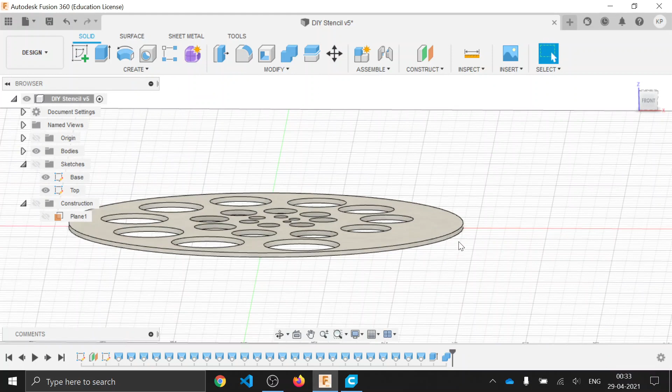It is a stencil. It's a shape that's used to draw circles on a piece of paper, and to be specific, you can draw circles that have any integer diameter starting from 1 mm to 25 mm, right? And the diameter of the whole thing is 140 millimeters. The thickness is 1.5 millimeters. It's a relatively simple model. We can look at the sequence of operations I did.

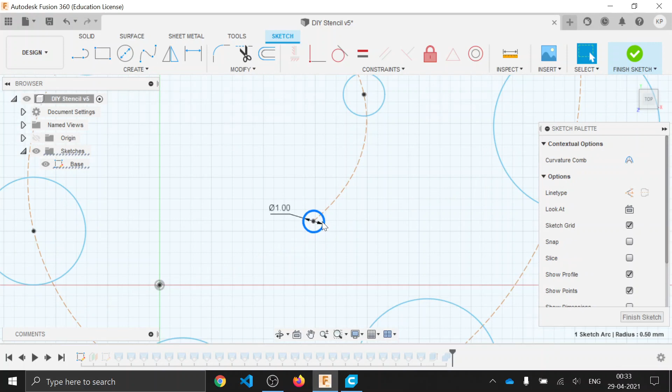First, I started with drawing a sketch at the base, which we can see here. Obviously, it's a very simple sketch. It's a circle of 140 mm diameter. I've taken 25 circles starting from 1 mm and then 2 mm and then 3 mm all the way up to 25 mm, and all I did was I just manually placed the circles in this spiral manner.

I've drawn this T-spline passing through the centers as a construction line, and I just kept shifting the centers manually until the spline looked roughly like a spiral. That's it really. It's just mostly manual adjustments, and I'll be honest, I spent quite a while on this, and I'd say it does look more or less like a spiral. It does get the job done, right?

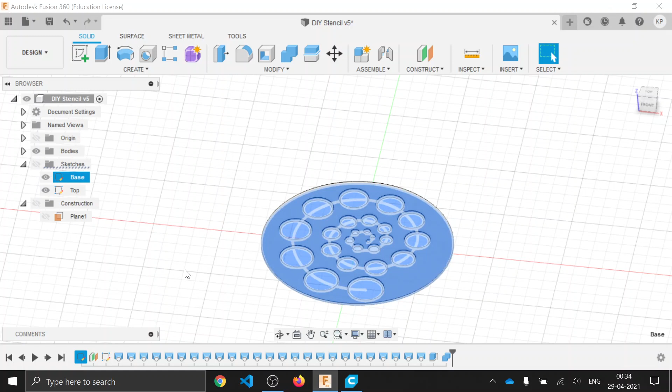Now, my original goal was to just extrude this base by 1.5 millimeters and call it a finished product. But that would have been a problem, because if I had just extruded the base perpendicularly, these holes would have been cylindrical. And that's an issue because, say, for the smaller circles, if this hole right here was cylindrical, then it would have been difficult to actually place the pencil lead and be able to turn it, so to be able to properly trace out the bottom circle. Say particularly for the 1 mm hole, we won't be able to actually orient the pencil at all. It would make things difficult.

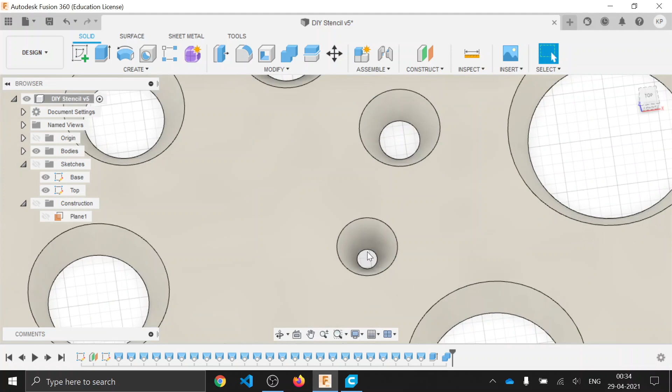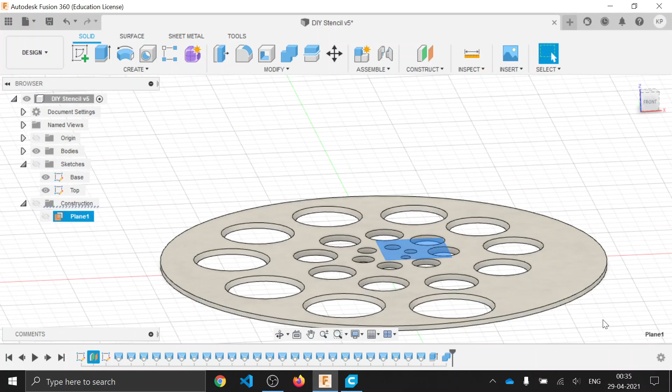So to avoid this, as you can see, I have made the holes a little tapered. So instead of being cylindrical, they are frustum shaped. The upper circle in each has a higher radius than the lower one. Now, well, how did I do this? Okay, I have constructed a plane which is parallel to the XY plane, and it's 1.5 millimeters above it. And on this plane, I drew another sketch.

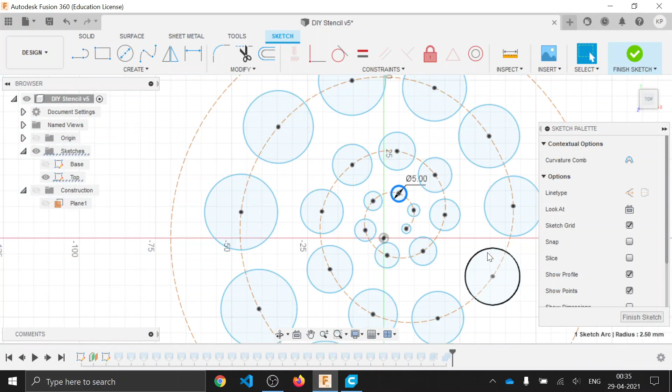I just copy pasted the centers of the base sketch, and I drew the circles as before. But this time, the diameter of each circle is higher by 2 mm. So this has a 3 mm diameter. This is 4, 5, 6, 7, 8, 9, and it would continue until 27. And these two are just construction lines, the T-spline and the 140 mm circle.

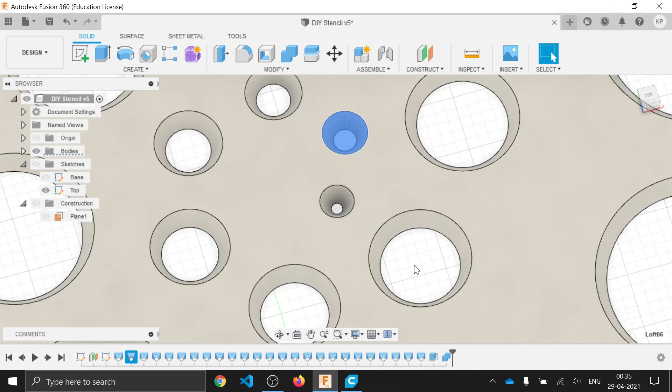And yeah, after this, I have decided to perform, as you can see, a series of lofts. Now, what did I loft? I have taken each upper circle and the corresponding lower circle, and I've lofted them to obtain this small frustum shaped solid. And then I did this for the next one, and then the next one, and so on. I generated about 25 lofted solids.

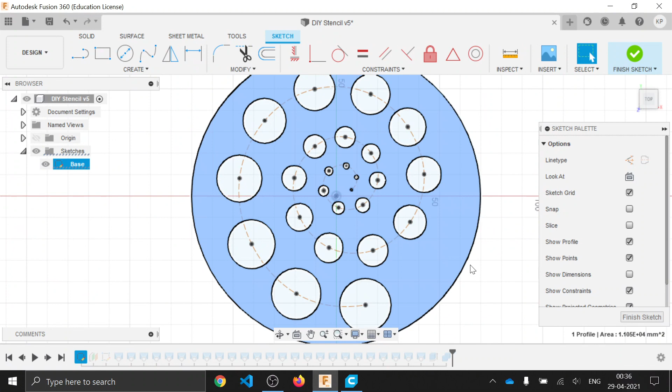Now, why did I do this? I did this so that I could extrude the base perpendicularly, and then from this solid I would subtract all of these small solids to obtain the desired shape. So that's exactly what I did. After obtaining each of these 25 solids, I have extruded the base, which is this profile, this dark blue part. I have extruded it by 1.5 millimeters, so it would give the stencil with cylindrical holes.

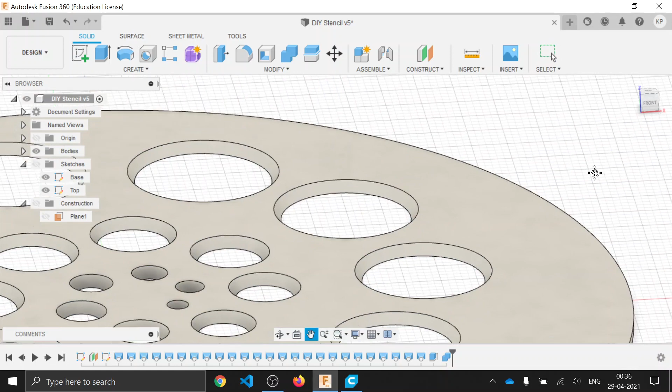And from this improper stencil, I perform a Boolean subtraction. From this stencil, I just subtract all of these 25 frustums so that this part gets chopped off, and we end up with the finished product in the way I desired. So there you go. This is the model in the CAD software. I can export it to an STL file.

I have actually already done that here in the desktop, and I've already imported it into Ultimaker Cura, so we can analyze it for 3D printing. Placement is fine. It's at the origin, and the dimensions, as you can see, are 140 mm, 140 mm, and 1.5 mm. So well within the limits prescribed.

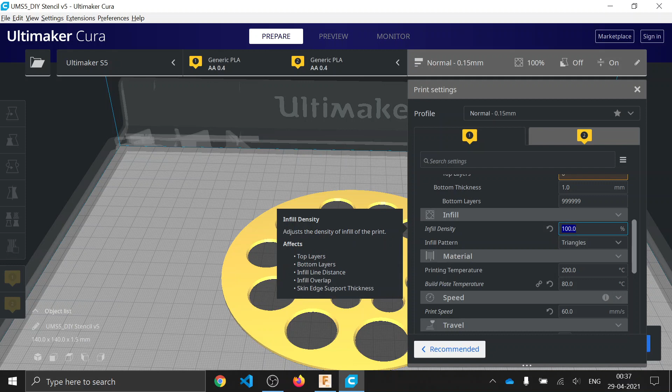And the print settings are as follows. I have chosen layer height of 0.15 mm and infill density of 100%. It's a thin solid, so it's fine. Printing temperature of 200 degrees Celsius, bed temperature of 80 degrees Celsius, print speed 60 mm per second.

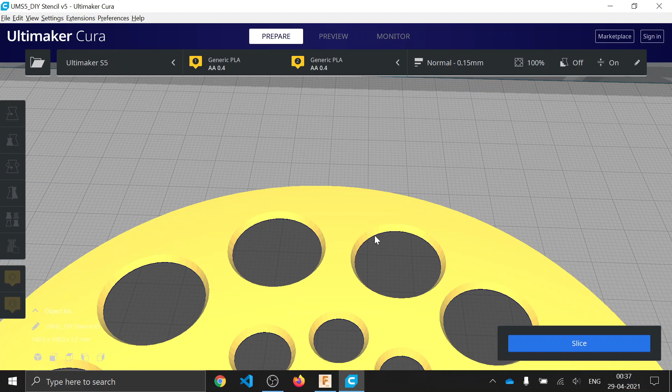I have actually disabled supports, but this model doesn't require any supports because as we print every layer, as we deposit new material, it is always on top of previously deposited material. There is no part which overhangs. You know what I'm saying? There is no part which is just printed on thin air. So no support is needed as such when we print it in this orientation.

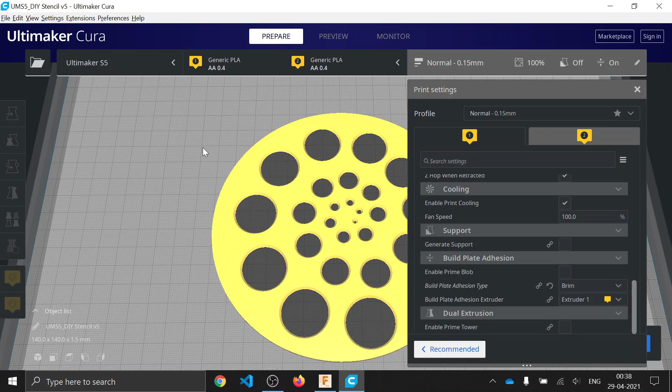This is how we would place the stencil if we want to use it. The bigger circles would be on the top. So whether I enable this or not, there's no difference. It's not going to generate anything. But yeah, I am generating a brim, to prime the material and just to act as a good support. But apart from that, we don't need any other support. I've enabled the brim, and when I go ahead and slice this,

we obtain a product that will take 3 hours and 38 minutes to print. 19 grams, that is 2.44 meters of filament. And if you preview how it's printed, it goes like this. Bottom layer is printed like this. First the brim, and then it continues like that, and then each layer is printed one on top of the other.

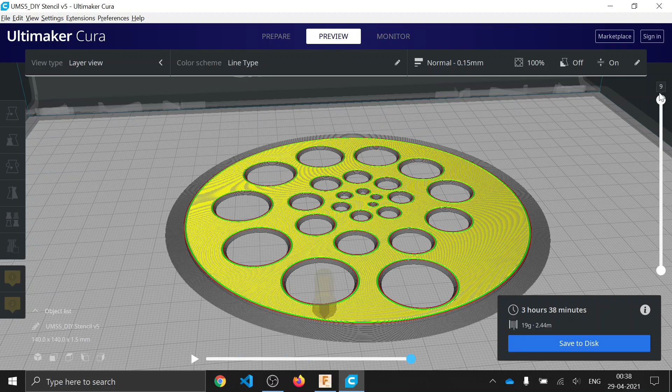It's only got 9 layers. It's a relatively thin model. And yeah, we can save this as a G-code file, right? And this thing can be fed into a 3D printer, and we can bring this model to life.